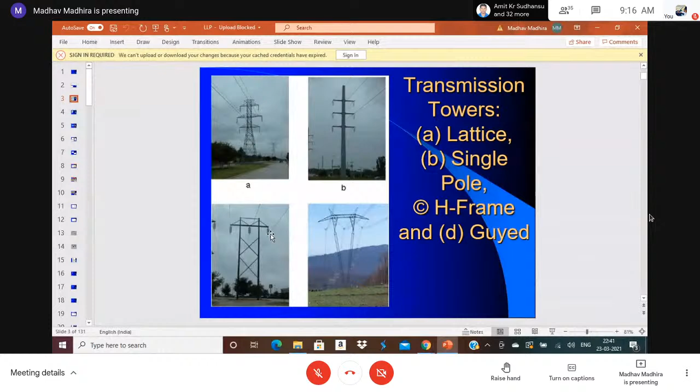Guyed tower is slightly safer because the forces are anchored down below, but other structures will have lateral forces from the cables. When you design, if the cables are all in position, there is not much of a problem. But if there is a cable break, which is what you designed for, then the whole pole or structure will be subjected to large lateral forces and moments. This is a very serious issue in many of these.

The latest, I would say, would be wind turbines, which are coming up all over, and the height and size are becoming very large. You can see recently they have set them up in 20 to 50 meters of water. The height above sea level is about 100 meters, and the wingspan is also about 100 to 120 meters. The wind acts on the blades, so obviously the forces are transmitted to the wind turbine pole and then down into the foundation.

Here we have different types of structures. You have an inverted type of foundation on the ground level, but in the sea you need a large group, you can't have a gravity kind of structure. So we end up getting very large lateral forces and moments. This will be one of the more interesting latest topics that all of us will have to deal and work with.

Another type of wind turbine, you can see the components. One is the horizontal axis about which the blades rotate. The second one would be a vertical axis one, and you see the components here. The scale you can easily see, it's a very high, very tall structure, so the wind forces are very large.

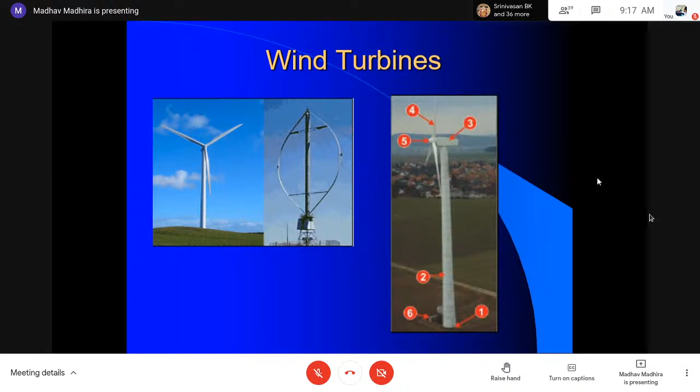This is how wind turbine heights are increasing over a period of time, and now we have gone into even deep sea, where we have to end up having piles to take care of the lateral forces. Once you have these wind turbines in the sea, you also end up getting wave loading, so you get a lot of cyclic loading, which means a large number of cycles, and the soil becomes pseudo-elastic, which you have to take care of too.

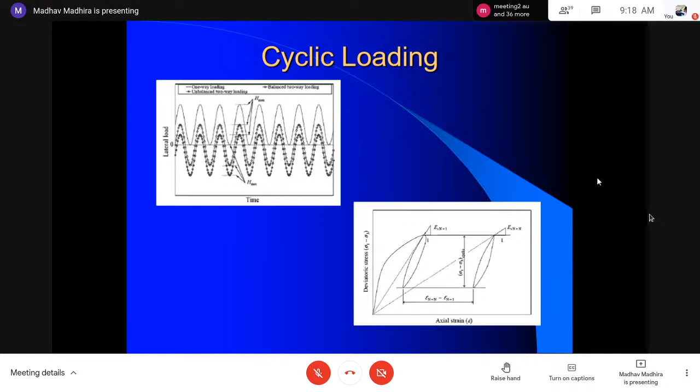Piles are used for a lot of purposes, apart from structural support, excavation support. Recently we had one particular case here in Andhra, where a deep excavation had to be supported by piles. We couldn't provide nailing because it wasn't adequate, as there was an adjacent building and no way we could nail it. So we had to put these touch piles and secant piles, all provided for support. Some of the retaining walls are also supported on that, and you see bridge foundations too.

These are some of the basement walls that you can see. Some of them can be jet grouted or cement mix piles. Particularly for these metro foundations, we are using diaphragm walls too. All of them take care of the lateral forces from the soil, not the structural load.

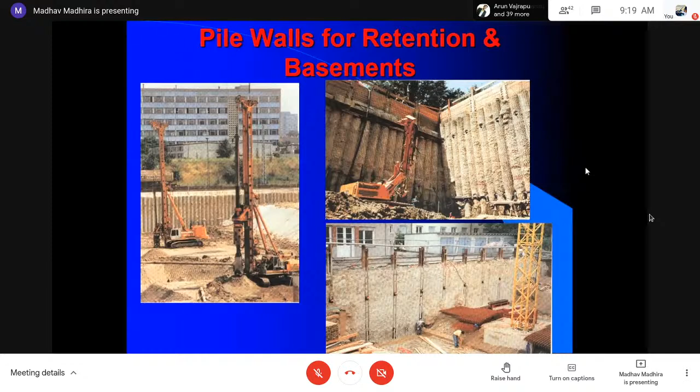These are schematics showing how some of the piles can increase stability. Once you put the piles, obviously you've got to shear them, so the shear resistance of the piles and their moment resistance contribute to stability. This is one case where we applied it in Himachal Pradesh, where the toe of the slope is likely to creep and fail. So we had to provide well foundations here so that the failure surface is intercepted, and the well foundations anchored into rock provide the support.

Of course, bridge abutments are another classic example. You not only have structural load from the bridge, but also lateral earth pressures, because of which you end up getting instability, in which case you have to provide piles both in the embankment and below the footing too. So these are various applications.

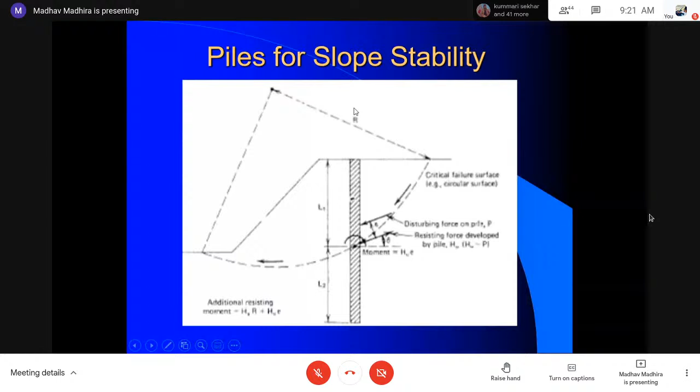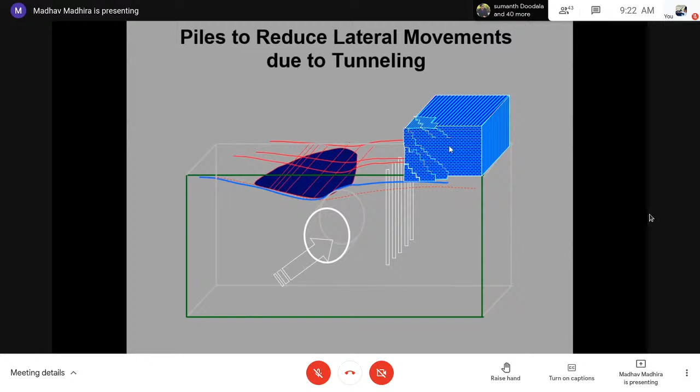Because of earthquakes, we'll have several lateral forces, which we have to design all the buildings and structures for. Of late, we are seeing a lot of activity around Delhi, Haryana. And even if there is a major earthquake in Jammu, Kashmir, Nepal, we find the effect right in this part of the country too.

So when I try to analyze the piles, I want to start with how to classify them, because piles are very long, slender members. So we first look at length as a criterion. You can have a short pile, intermediate length pile, and a long pile.

The idea is that a short pile, with L by D less than maybe 5 to 10, acts like a rigid pile. A very infinitely long pile acts like a cantilever, whereas for an intermediate pile, I need to consider the fixity at the top and bottom.

The second type is the restrained classification. Piles can be restrained at the top as well as at the bottom. We will see how it is being deployed. If I have no pile cap at the top, like a pole, it's a free pile, whereas if I encase the pile in a pile cap, it becomes restrained. At the bottom also, if I leave it in a deformable soil, it can be a free tip. If you just push it into hard rock, then it becomes pinned, allowed to rotate. And if you drive much deeper, it can become fixed too.

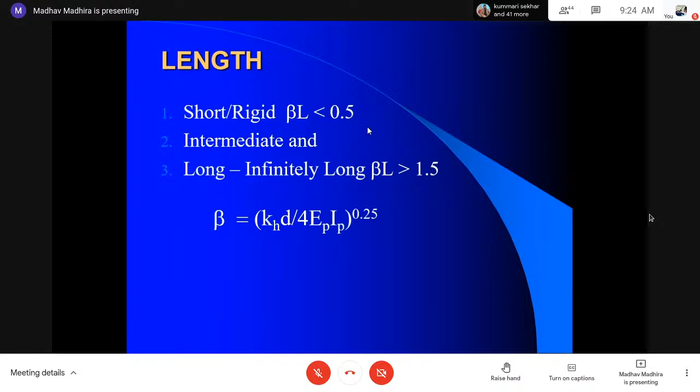If beta L is less than 0.5, you treat this pile as a rigid pile. And if beta L is greater than 1.5, or some people give it as 2.5, then it's an infinitely long pile. Other cases fall in between, and we call them intermediate piles.

As I said, for restrained, free, or fixed head piles: at the top, if it is free to rotate and displace, it's a free pile. If it is free to displace but fixed in terms of rotation, we call it a fixed head pile. The tip can be free, meaning it is free to displace and rotate. Hinged means displacement is zero but it is free to rotate. Fixed means both displacement and rotation are fixed. So these are the kinds of mechanisms.

Based on that, we try to identify what kind of failure is possible. So I want you to look at the possible ones here, and I have a rigid pile here. If you apply load, because it's a short rigid pile, it tries to rotate about a point of rotation, maybe located at some depth h from the top.

I want you to visualize the pile as being treated as a rigid one, which means above the point of rotation, the pile will move to the right because the forcing is towards the right, and below the point of rotation, the pile will move to the left.

So you can see the pressures that are mobilized. Maybe the soil is not strong enough, so you end up getting a smaller stress near the surface, and as you go deeper, this will increase. So we try to determine the reaction from this soil and put the pressure distribution, we linearize it.

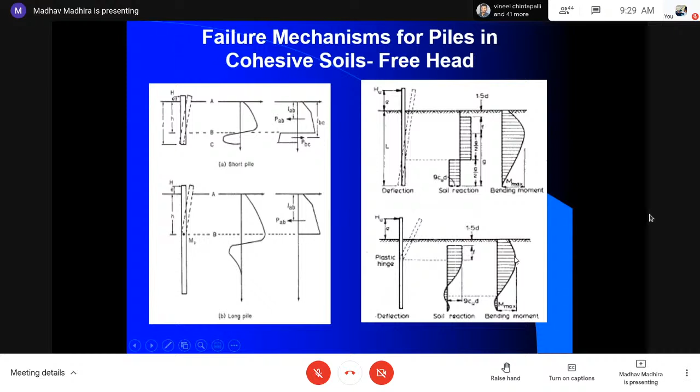If you have the pile embedded in a pile cap, I want you to notice this. Most of the time, this is the most common situation wherein about 300 to 500 mm, the reinforcement from the pile is taken into the pile cap and you cast it. That means the pile is no more free to rotate, but it is allowed to displace.

Lateral displacement is allowed. So if I have a force acting here, it will be a rigid body translation, in which case the full soil resistance of 9 Cu is mobilized, and you calculate the force, and you will find that the bending moment is obviously very high or maximum near the ground surface, and as you go to the tip, it becomes 0.

Then there are other mechanisms where you have a relatively large pile, and if the bending of the pile cap reaches the yield moment, the pile will yield and you have a hinge here, in which case the pile is still rotating as a rigid body, and then you will get the second kind of mechanism. If you have a very long pile, you may end up getting 2 hinges, one at the pile cap, and as you go deeper, the bending moment on the other side.

One is a negative bending moment, as you can see here. The second one is the positive bending moment, and we had to analyze these conditions.

This is what I keep telling, that piles are not very simple. You have to look at the restraint at the top and bottom, and also the length. So this is a very simple way of showing it. I have a short pile encased, so you can see simple translation. Then as the length increases and the bending moment stiffness becomes large, you get the first hinge. Go further, much longer, and you end up getting 2 hinges for the lateral capacity.

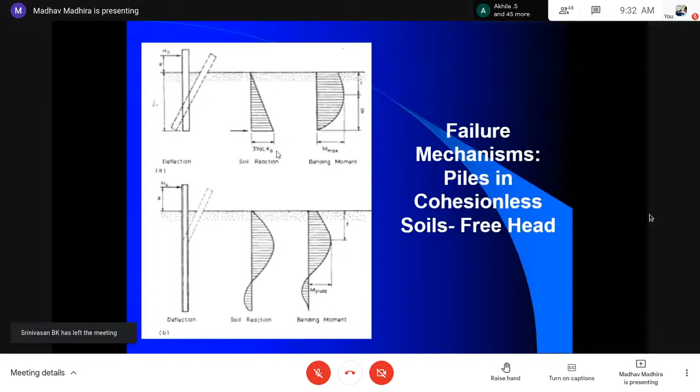If you have a restrained head pile in sands, it's a very similar analysis. You have the pile cap here, the pile is embedded in the cap, and it will be a rigid translation. So H ultimate value is simply equal to the area of this triangle. The bending moment is high at the top because that's encased. Then if this starts yielding, you get the first hinge, and if it yields in between also, you get 2 hinges. So it's a very similar analysis, except we take the passive resistance instead of undrained strength as in the earlier case.

I think Professor Reddy just now talked in terms of socketed pile. Then we had to look at the different medium. Here you can see the pile is socketed, and in this case, because the soil above is not very strong, the point of rotation goes into the socket length. If that is so, I had to consider the reaction from the hard rock here, to the left and right.

Some of the mechanisms they suggest is, instead of that, we introduce an equivalent force to the left and then continue this reaction from the right side, and we try to solve by trial and error to find out how much it is, because finding the exact point of rotation inside a socket length may not be that easy.

So something like a sheet pile analysis, we extend here and try to find out the resistance. The equilibrium equations are very simple: sum of the forces should be equal to 0, and moment or rotation about any point can be 0. So with 2 equations, I can always solve for 2 unknowns and get the values too.

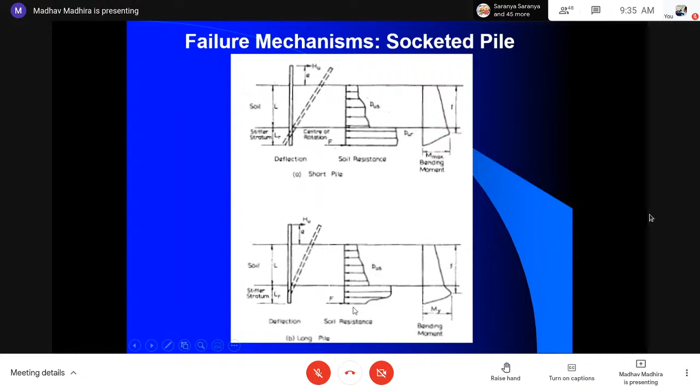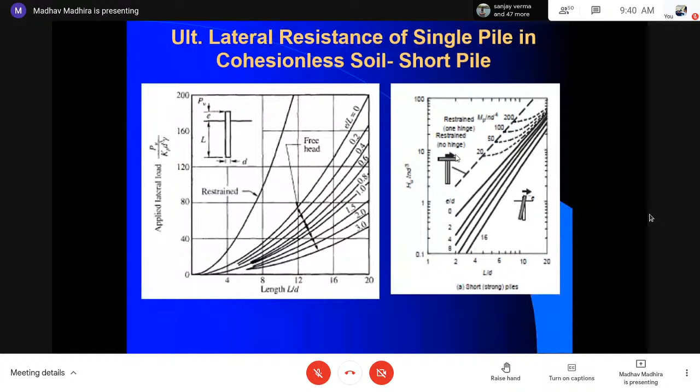In cohesionless soil, we make a slightly different analysis in terms of passive pressure, and we get charts that are very similar, except the magnitudes are very different in this case. Again, I want you to look at this simple case, L by D 8. If I have a free head pile, I get a normalized ultimate load, which is here ultimate load by Kp diameter cube into gamma, against L by D. If I look at 8, I get less than 40, that's maybe around 38 or 35.

If I restrain the pile, I'll get something like 80 to 90, which means even a short pile will have something like 2 to 3 times more capacity, and the longer you go, the gap is much higher. So the most practical situation is you have a restraint at the top, and a free head is very uncommon.

Then you combine the yield moment here and you have a very similar chart as L by D increases. If the yield forms, the yield moment reduces the ultimate capacity, but it is still higher than a free head pile with E equal to 0, no eccentric load.

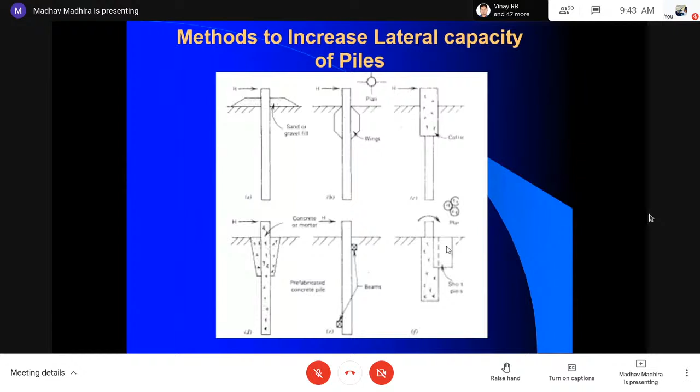I have one pile, and if I know the direction of the lateral force - this is possible in cases where we know the lateral force is acting to the right and the moment is acting there - we could provide short piles to prevent the top of the pile from moving. But in many cases, you cannot fix the direction of lateral force, then you have to do it all over. That is with regard to the ultimate capacity.

We'll now look at the possible variations or how to find the displacements. The most common and simplest analysis treats the soil-pile interaction as a simple Winkler model. I think you all know a Winkler model is nothing but a spring, and the force in the spring is proportional to the displacement.

What we slightly modify is that we provide the Winkler spring with a slider, which means there's a maximum force it can take. After that, it will start moving, which means it is yielding, or the maximum pressure is constant. This is called the modified Winkler model, where the soil reaction is linearly proportional to displacement till it reaches the maximum lateral force or pressure. After that, it will be sliding.

Once you do that, you can easily analyze and get the response displacement at various loads. How do we do that? One alternative is to say the soil resistance is not a straight line anymore, it's a sort of hyperbola, and this is the maximum soil resistance the pile can offer - say 9 Cu, if you want to put it in.

Then you can say as displacement increases, instead of taking the tangent modulus, you take the secant modulus. That way I can take the nonlinearity into account till I reach the ultimate load, but I'm looking only in the working load range. So I estimate displacement with a certain tangent modulus, and once I get the displacement, I go to the curve and get the secant modulus. I put this E value in, and we found that in case of sands, E increases with depth.

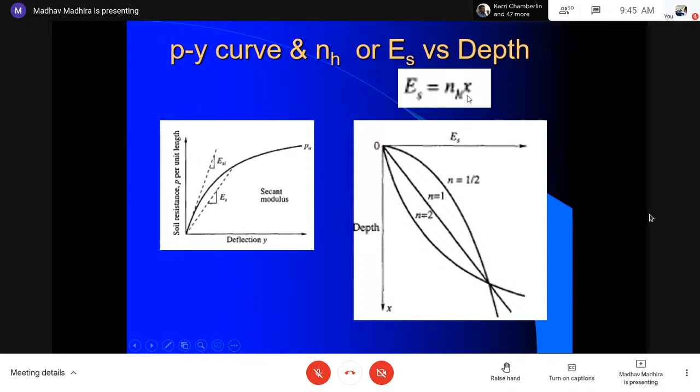The possible variations are a linear one, or it can increase sort of parabolically and reach a very high value, or it can increase with n equal to 2. Most common, I would say, is n equal to 1, where we look at E increasing with the distance or depth from the surface. Once you do that, this is how it looks.

We try to find out KH from plate load test, and convert it from here. If you have this, this is one of the standard ones. If I determine E corresponding to 50% strain, I can calculate KH. If you have undrained strength, C of the soil, another correlation says 80 to 320 times Cu by D gives me the subgrade modulus. So if you want some average value, you take 200, something like this.

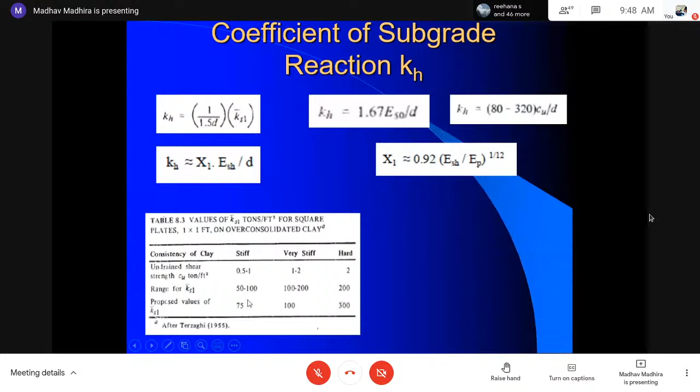Here are the charts that I could get from some of the publications, which Terzaghi gave in 1955. You have undrained shear strength, stiff soil, very stiff soil, hard soil. The range of K is something like 50 to 100, 100 to 200, and more than that. He recommends a proposed value which is about half of these. So you take some of these if you don't design it, but if you can have some reliable charts, you can always go for this one.

So once you have those values, we can predict the displacement. You have found out KH, you know the length of the pile, this H is the lateral load you're going to provide, E is the eccentricity. So I can calculate the displacement here.

Here you can see these values are given in terms of beta L, which is a short rigid pile less than 1.5, and I can get the lateral displacement with a very simple equation. You also get the rotation here. Theta is the rotation of the pile at the top, 6 times H into 1 plus 2 times E eccentricity by L by KH D L square. So you can easily find out these values. Beta, as I said, you calculate as modulus of subgrade reaction into D by 4EI to the power of 1/4.

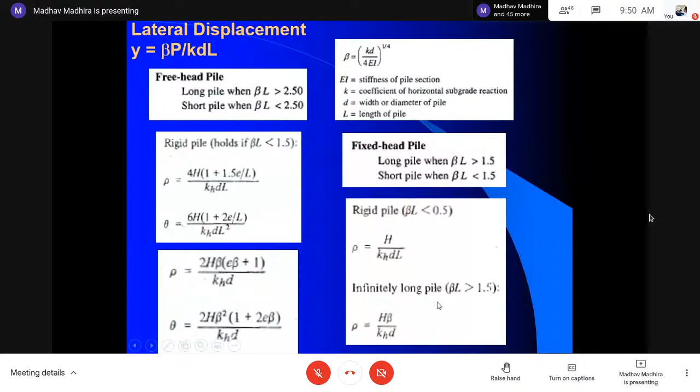So for a rigid pile, a short pile, a long pile, fixed head, you can easily calculate the displacement. These are all available in any book, or for restraint, these kind of things too, charts, books and codes also. If you have a finite length pile, you calculate beta L. As I said, we look at something like 1.5 to 2.5. Otherwise it becomes very large.

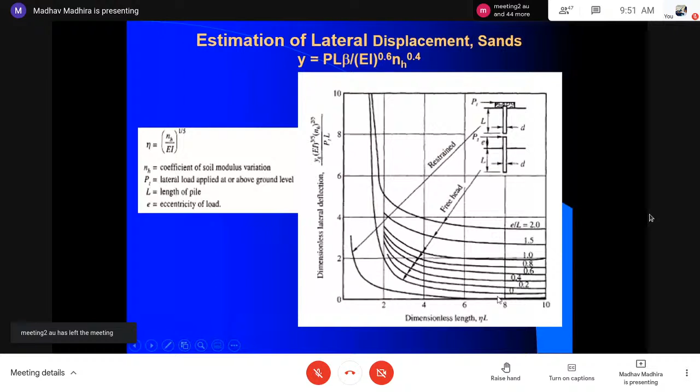So these are some of the more charts given based on analysis, and they find what is called the critical length. Another alternative is to find a critical length, a function very similar to our beta but slightly different, and based on that you can predict the lateral displacement and rotation due to both force and moment.

This is for non-homogeneous soil. Then Poulos at Sydney University came out with a continuum approach. Instead of treating the soil as a Winkler medium, we treat the soil as an elastic continuum with ES as the modulus of deformation, and the coefficient Kr is a relative flexibility parameter. EP IP, the flexural stiffness divided by ES into L4, gives me Kr.

And then he said the displacement is a function of load, H2, rotation due to horizontal, displacement due to horizontal force, and this is due to moment. Similarly, you can get rotation in terms of horizontal force and the moment.

He has given a series of these charts which are available in his book. We can download them from the internet too, as a function of Kr. Kr of 10 to the power -6 is a very flexible pile, and Kr more than 10 to the power -1 becomes a rigid pile, where displacements are almost constant. So as a function of L by D and the relative stiffness factor, I can get displacement.

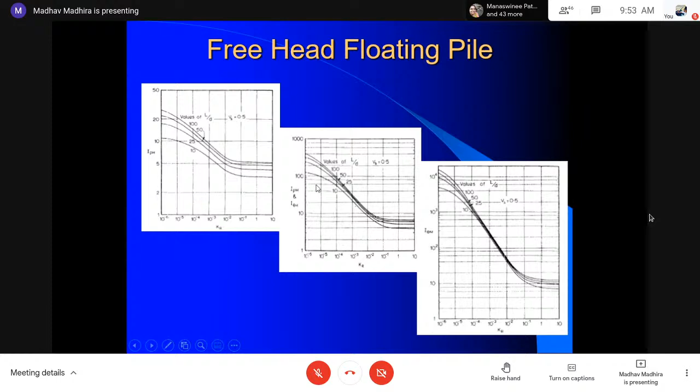Once I have I rho H, I can substitute H by ES into L into I rho H to get displacement due to horizontal force. If I know I rho M, as you can see in one of these charts, here is the relative flexibility parameter Kr and L by D. I can get the I rho M, go back and calculate the displacement due to moment.

So very simple design charts are available in all these cases. Similar to what we have seen earlier, we have a fixed head floating pile, and with the relative flexibility factor Kr and I rho h, you can substitute there and get the displacement. You will find once again the displacement due to fixed head at the top will be much smaller.

This is for sands, where modulus of deformation ES is increasing linearly with depth. In this case, we define the relative flexibility parameter as EPIP into NH. Earlier we had E into L4, but now we get the rate of increase of E with depth, which is NH into L5, and you again get in terms of Kn and the parameter I rho h for sands, or where the soil E increases with depth.

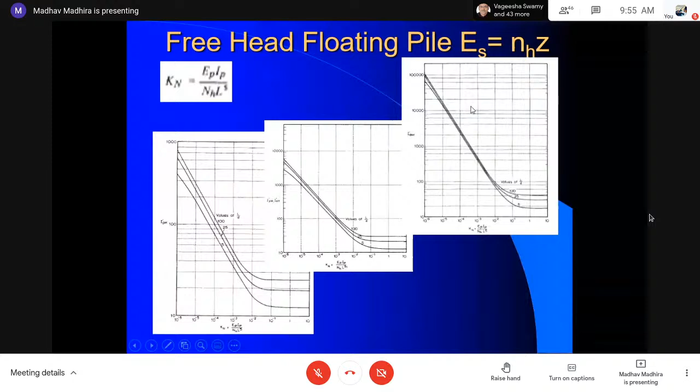This is for I rho h, I rho m, and this is I theta m, the moment rotation due to moment. If you socket it, it makes a big difference. You'll get another set of curves here, and you'll have to take those parameters.

I just wanted to show you what could happen if you have an earthquake. The problem is people think piles are good for seismic resistance, but it's not necessarily true. What could happen is, in this particular case, as you can see, you have an earthquake, you have a building with piles.

Because of the moment, the soil got liquefied and the resistance is gone, they ended up with a crack, or the pile has sheared at the interface between the reclaimed fill and original sand layer, and so the building got damaged completely. So what I want to say here is that piles are not a simple solution for earthquake resistance. You have to look for alternate ways of improving the ground rather than providing piles alone.

These are the different mechanisms we consider with the pile mechanism, with piles for support. This is a typical pile foundation. There could be a shear failure, or you can end up with bending failure here. This is a buckling kind of mechanism, and this is what you call dynamic amplification. As you go from bottom to higher level, the earthquake force gets multiplied.

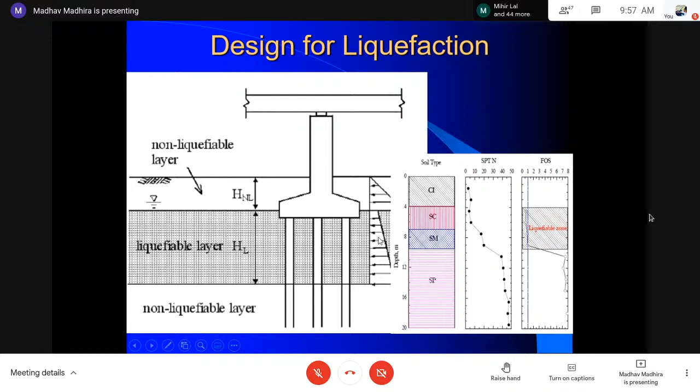So the pile may end up getting a large displacement. It can also, if you restrain at the top, it may kind of hinge at the bottom, and you'll get a large displacement at the center, or you'll end up getting these kind of loadings in these cases. When you have cyclic loading, you have a similar problem, or much more complicated. If the pile can move along with it, fine, but if the pile is restrained, because of the inertial force, you will get a lot of resistance here.

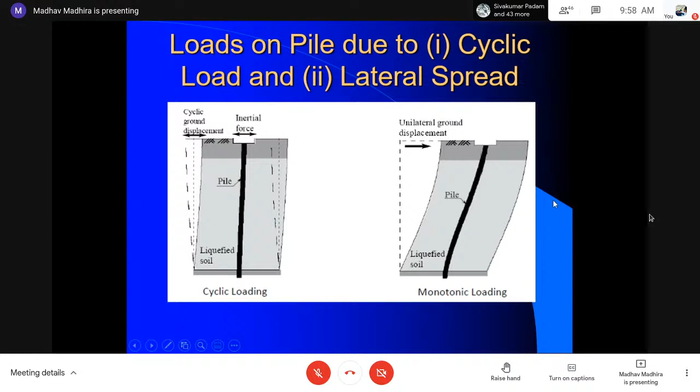So people talk in terms of liquefaction potential index. We had to calculate based on these parameters how the factor of safety against liquefaction varies at different depths. What is the displacement with depth, and you calculate the liquefaction potential index as a function of depth and the factor of safety against liquefaction. Only when you have low values of LPI, otherwise you will end up getting higher liquefaction intensity.

Based on that, if N is equal to less than 8, you can see the chance of liquefaction are very high, and you have to reduce the modulus, whatever is the static value, to less than even 10%, you can see it's hardly 5%, which means there is hardly any resistance. Whereas for higher values, the smaller values of this, you can get much higher one too. These are N equal to 14 to 20. So wherever you end up getting SPT-N less than 8 or 10, be sure it's likely to get liquefied, so piles may not be a good solution.

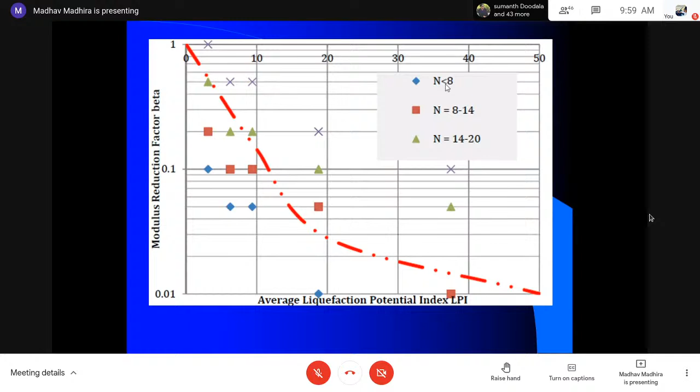I just want to show you one particular design. They were suggesting for earthquake, bored cast-in-situ piles. We were recommending that you try to improve the ground first with stone columns, and we also said that it will be good in terms of carbon footprint.

So we just compared, this is for Delhi Metro, bored cast-in-situ piles. The carbon footprint because of concrete is so much, 667,516 kg. The reason is, when you want to manufacture cement, 1 ton of cement requires 1.5 tons of carbon dioxide releasing. 1 ton of steel probably generates 2 tons of carbon dioxide.

So when I look at the typical project, if I use bored cast-in-situ piles, you're generating about 1,250 tons of carbon dioxide. Whereas if I improve the ground, I only use about 161 tons of carbon dioxide, because when I'm breaking stone, I need a lot of energy and I need to transport it during installation, etc. So we recommend that in case of liquefaction, piles are not the solution, ground improvement is the best one.

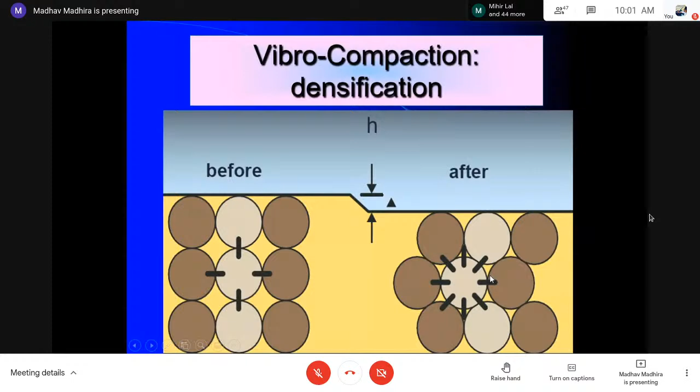And how do we do that? We know the sands are in loose condition, which means one grain is sitting on top of another. That's how you get the loose condition with high void ratio. If you can vibrate it with something, you can rearrange the particles so that they sit in the valleys of the adjacent lower one, and you reduce the void space, you increase the number of contacts, and it becomes very dense.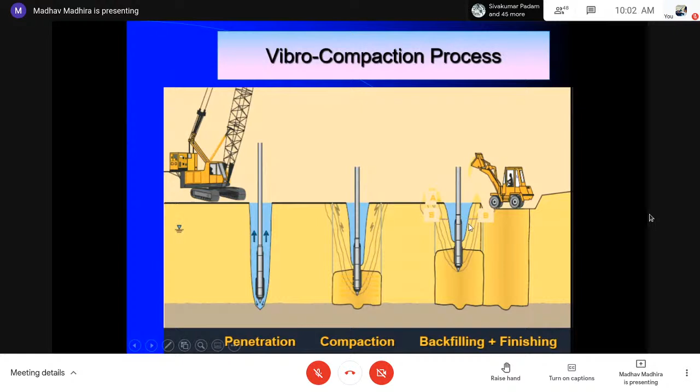You're audible, sir. Okay, so what we do now is that we try to densify the ground by vibrocompaction, and the simple mechanism would be you introduce the vibrofloat, compact it, and add material to finish it to complete this thing. We found out this is a very good alternative.

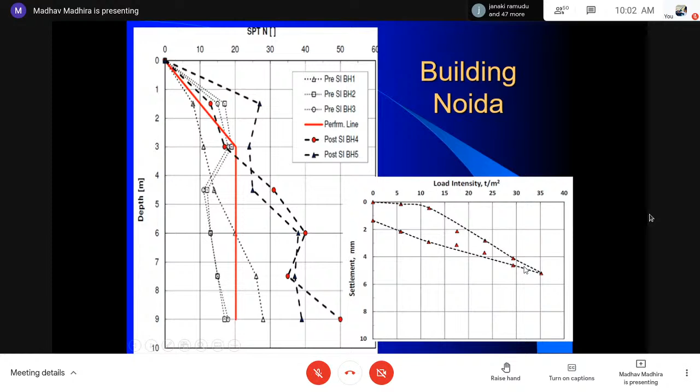Another case is a building in Noida where you had very low N values, and after densification, you have more than 20. Another way they tested was a simple plate load test, and even with something like 30 tons per meter square, the plate gave hardly 4 to 5 millimeter settlement. So the effect of densification you can see here.

then introduce your piles if necessary. The main thing I want to show from here onward is that the capacity of the pile depends on the displacement, or the allowable load that you can put is a function of displacement, and we should not go for those ultimate design values. So one of our colleagues here, Professor Padmavati at JNTU, worked a lot on this.

She was studying the response of a pile due to lateral force and moment using Winkler, except that we were looking at a hyperbolic response, which means the lateral stress increases with displacement, whereas earlier it was linear. The lateral response is subgrade modulus into rho, but instead, you take it as a hyperbolic response wherein the lateral resistance Q equals Ks into rho, the lateral displacement, divided by 1 plus Ks into rho by Q max. So as you increase the displacement, the pressures decrease, and this is how the response looks.

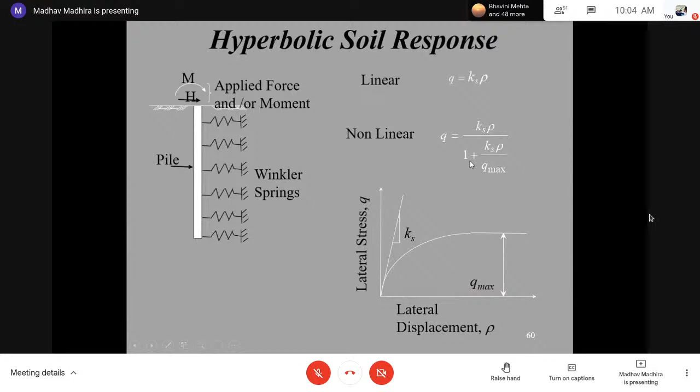So she was trying to analyze this using a simple mechanism, a short rigid pile, where the displacements are maximum here, decrease to zero, and increase on the negative side linearly below. So if I know the displacement profile with a rigid pile, I can substitute here and get the value of Q and integrate it. Very simple mechanism, and we can also find out the point of rotation from the equilibrium equation, and this is what she did.

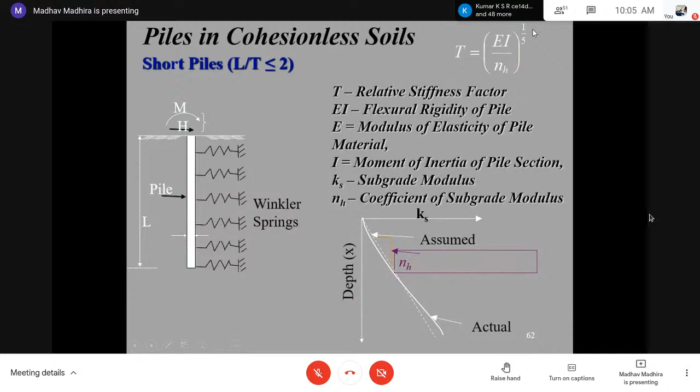So we're trying to look at various alternatives. If you remember, Broms was suggesting an ultimate load, also given by Hansen, Broms, then one of these Polish mechanisms, Meyerhof, then we had Prasad and Chari from Newfoundland, and the resistance variation in different forms were considered, as we were looking at various alternatives in terms of Ks and Q max variation with depth.

Ks is increasing with depth at a rate of alpha K. The ultimate resistance is also increasing at alpha Q. So you can write those equations very simply based on this pressure distribution.

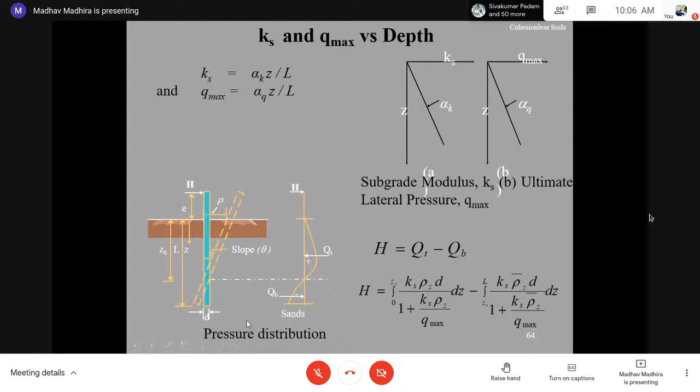So she did a lot of parametric analysis. We looked again at the rate of increase of dry moist sand above the water table versus below the water table. Obviously below the water table this will be much less compared to above. This is taken from Terzaghi.

She worked for different lengths of pile, 3 to 30 meters, pile diameter 0.3 to 6 meters -- of course very high. Angle of shear resistance of the soil is 25 to 50 degrees. Unit weight of the soil varies from 16 to 21.

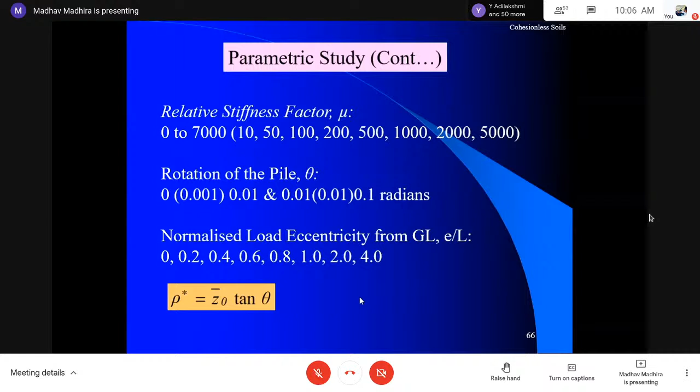So we convert that into relative stiffness factor, pile rotation theta, and normalized eccentricity, and these are the curves. I want you to look at the variation of load with displacement, which means you don't have to go to the ultimate value -- you can work at different levels. Mu is nothing but subgrade modulus into L by Q max.

If Q max is very large, obviously mu will be zero and you will get a linear behavior. But I can calculate, based on the subgrade modulus, the displacement for various loads, or if I know the load, I can get the displacement. So first, we are able to predict the displacement for a given load, or for a given displacement what is the load, using both Ks and Q max. So this actually depends on how the pile is behaving.

And how do I get the ultimate load? When I have pile load tests, I use the Kondner plot, which is hyperbolic. Displacement by H is plotted against displacement, take the slope, and the inverse of the slope gives me the ultimate load.

So I've been able to estimate these and now predict even the point of rotation. As mu increases, the point of rotation goes deep below for different loads too. It is not a constant, it varies with depth.

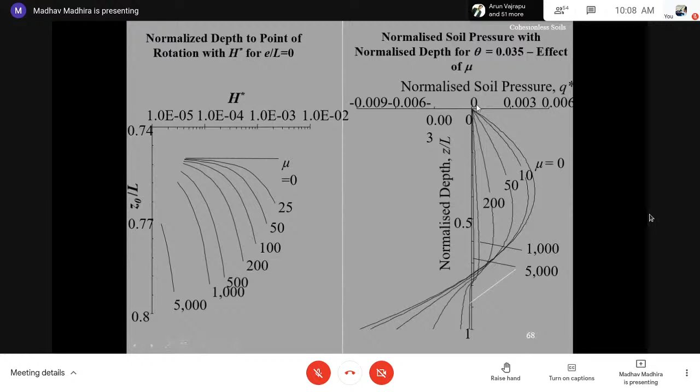This is something I would like you to see, and these are how the pressures are mobilized. I want you to see the difference between these pressures and what Broms assumed, that is for ultimate load. You can see the pressures here could be very small at the top because soil is very weak, and then you get much higher values.

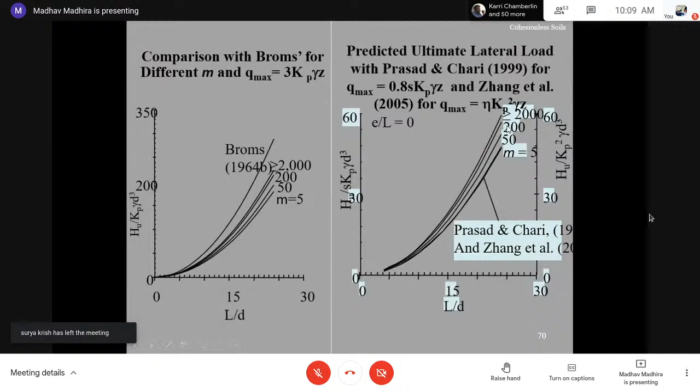So when I look at the kinematics, how the soil-pile soil reaction looks like, here is the design chart for different L by D and different eccentricity. You get the ultimate load, which is a function of both eccentricity and L by D. And then we are also looking at the comparison between predictions and the ultimate values.

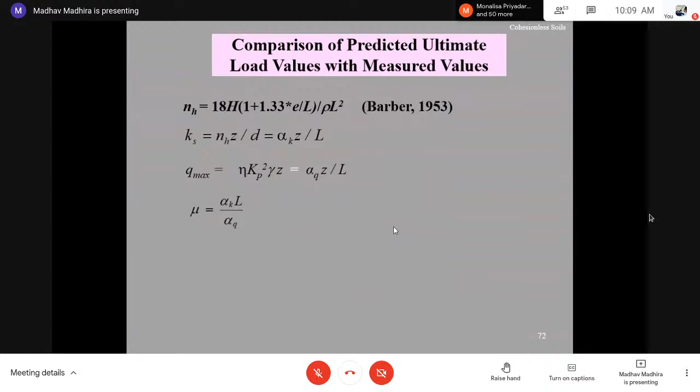This is a very interesting one where we found out different mechanisms and different values of how people are predicting. I would like you to see, compared to the observed and measured values, there's huge, sometimes very significant difference.

And you find that this is measured HU versus, and initially for small values, no problem, but these are all lab experiments, so you can see small load. But once you go higher, you find the values are very high. According to Dr. Padmati's work, you can see her predictions are all falling on the 45-degree line, which means if you look at the kinematics, you can predict better.

We also try to compare in terms of the load displacement relation. You can see here, the actual observed values are the points, and theoretical value is given here, where we didn't know the exact value of resistance, but because these are all very small model scales, we scaled the angle of shearing resistance and we were able to measure better values.

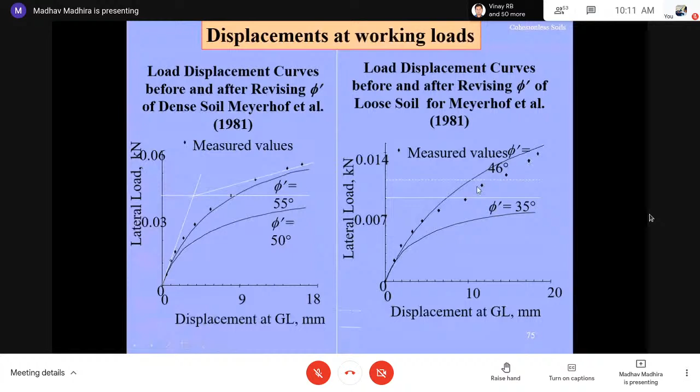Here is another case we got from Meyerhof data, and we find that the fit is much better. So when you look at the lateral load capacity, the kinematics is very important.

Why do we say that? Because you can see under high stress, the Mohr envelope for sands is highly nonlinear, and you should not take a simple linear relation. We find that it can be a curve, and that is why we include that.

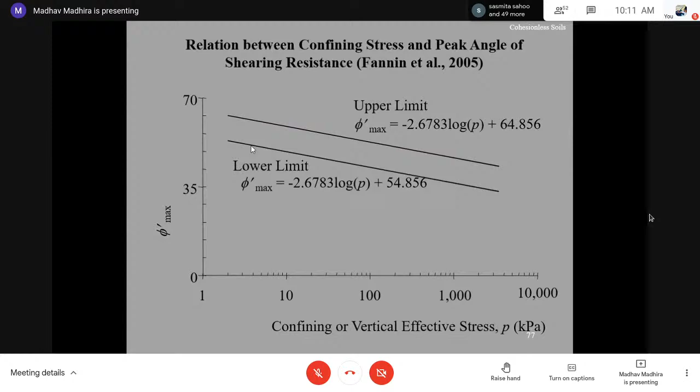This is what we were looking at in terms of as a function of vertical stress. At low vertical stresses, you will have higher shearing resistance, and at larger ones, lower. So when you interpret your lab test, don't go for direct shear test result, go for a low value shear angle of shearing resistance for a low normal stress. This is what was happening.

This is another interesting data we have. This, of course, is load displacement, which is matching. These are other lateral pressures which are measured by Radhakrishna in '73. We had this data, the measured values are the points.

And the ones predicted by Padmati are much better, much closer compared to earlier predictions. Another prediction you can see using Padmati's data is much closer to the measured values.

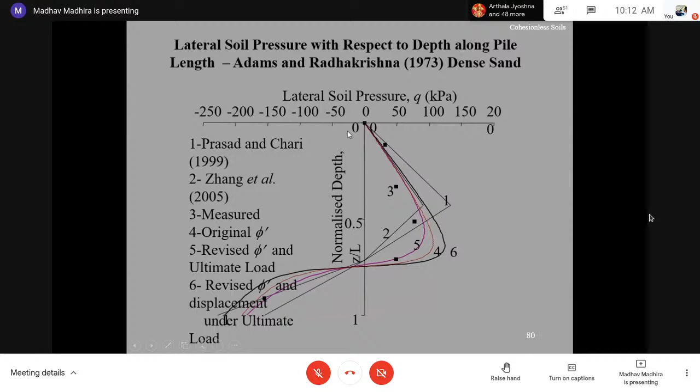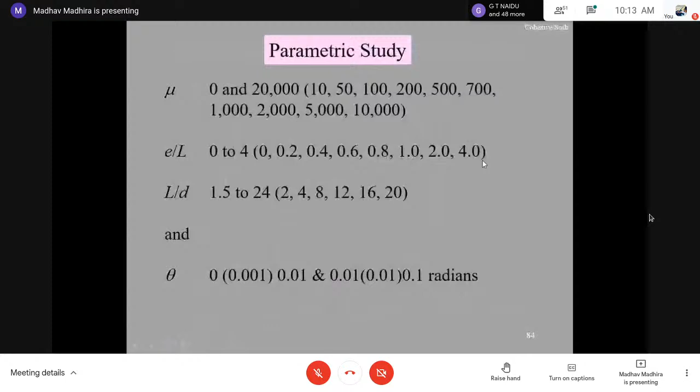And the present approach is where we are assuming a gradual variation rather than a step function. Okay, and this is how we are able to estimate the lateral capacity.

The Broms predictions are here, and the McDonald one, whereas ours are a function of this parameter mu, which is your Ks into L by ultimate resistance. So instead of just looking at only the ultimate resistance, the stiffness also is very important.

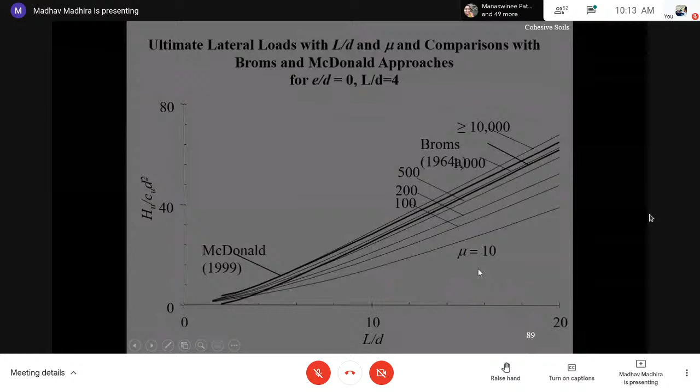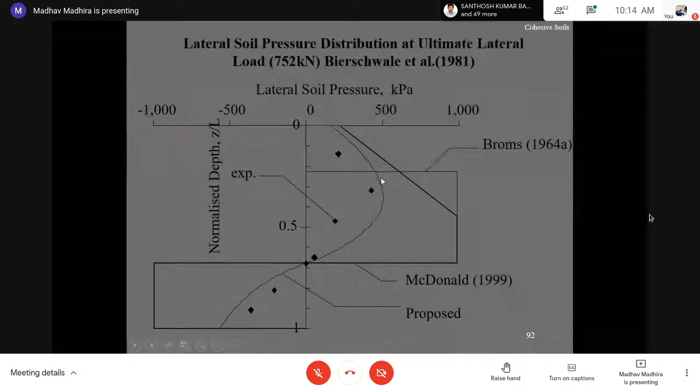So what I would like to finally recommend is this: another good comparison. Broms and McDonald give the step function, whereas if you take the kinematic approach, you're able to predict the variation with depth, and this is how it improves.

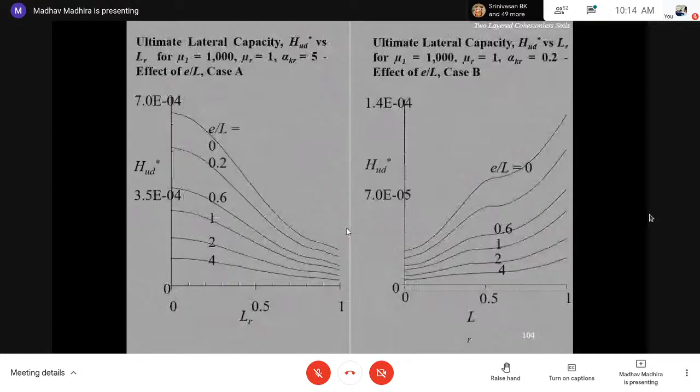Similar to what she did for layered soil too, and we have a lot of data based on that. You can do this for different combinations. This is another good fit we had between experimental and proposed results, and they match.

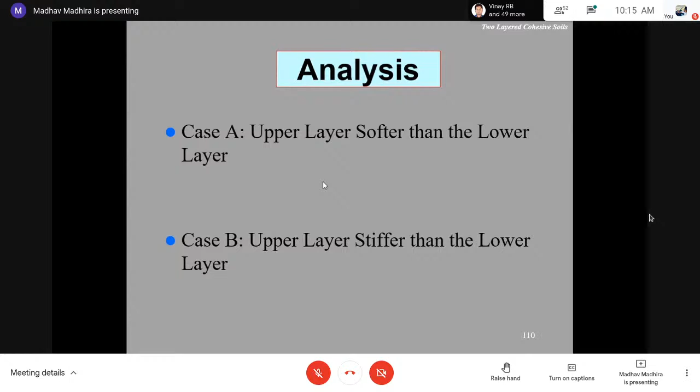Two layered cohesive soil: you have one type of soil above, another type below, and she did a lot of parametric studies. You can have a softer soil overlaying a stiffer one, or a stiffer layer over a soft one too. You are able to generate these parameters and get your variation of lateral pressure with depth.

This gives your load versus displacement for different combinations of layer thicknesses and layer stiffnesses. You get many of these charts, wherein you find the ultimate lateral load as a function of the layered soil configuration.

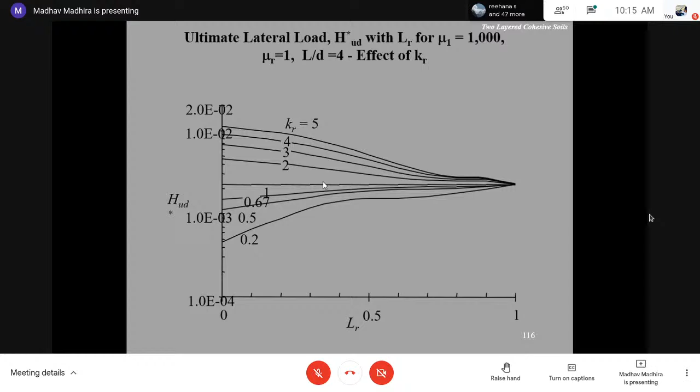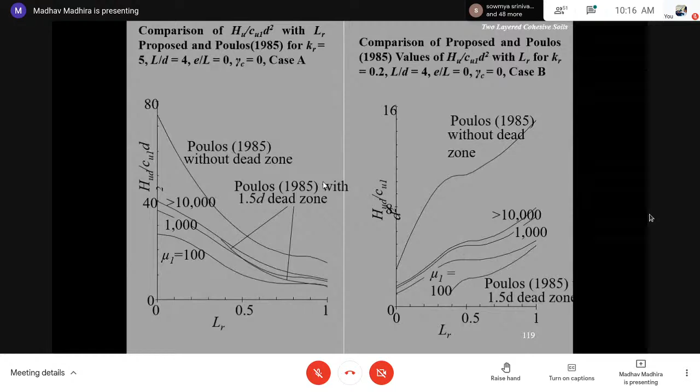We were able to compare with some results available from Poulos. He said there is a dead zone, whereas we have a continuous profile too. The way Poulos looked at it is a step jump, whereas ours would be a gradual variation because of the kinematic approach. So these are some of the comparisons.

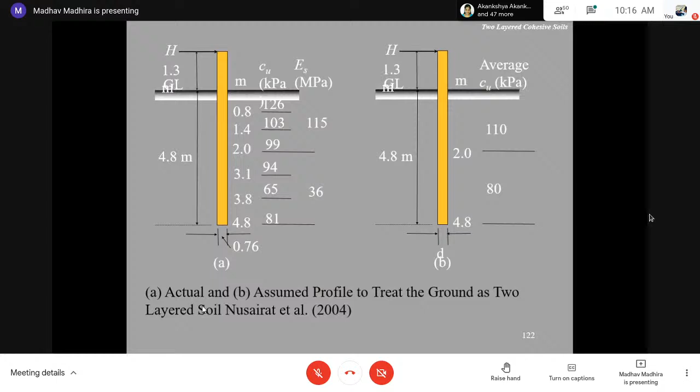One particular example where we had a two-layered soil. Actually, it's a little more complicated, but we converted it to a two-layered soil, and we've been able to predict values that matched closely with measurements using this proposed theory.

When you have a pile group, Poulos again came with a very interesting analysis. If you have a pile here, and another pile adjacent to it, the interaction depends on whether the adjacent pile is in front or away from it.

So I want you to look at this angle theta. If theta is 0, the second pile is in front, and if theta is 90 degrees, the second pile is orthogonal to it. So the influence varies as a function of theta, and you can see that being in front gives you maximum interaction, while orthogonal gives the least.

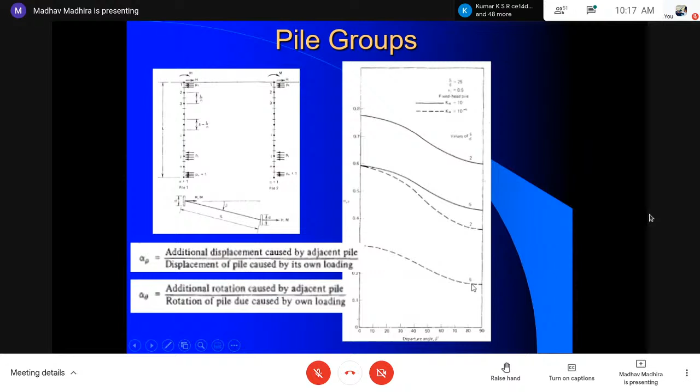He calculated the displacement caused by the adjacent pile due to the load. It increases depending on the spacing, giving different values. If you have a close spacing of 2, you have very high interaction, and if spacing is 5, it's much less. These are the interaction factors for various conditions he has given.

So we can analyze pile groups based on this value. Based on that, he finally came out with the group reduction factor, which tells us what the settlement of the group will be relative to that of a single pile.

Again, you have the fixed head pile and the free head pile, and you can see that it's a function of the pile fixity. The more interesting thing would be how these loads are affected depending on their location.

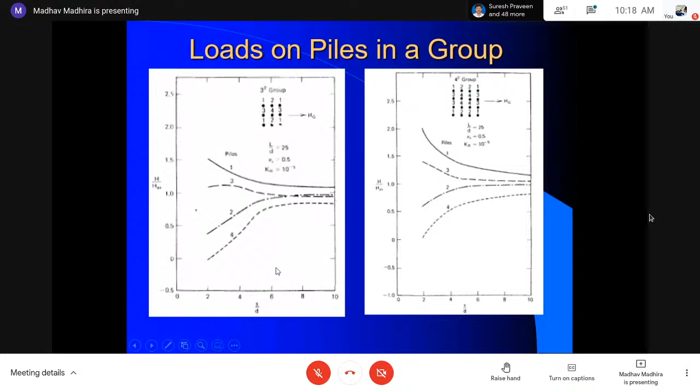I would like to end with showing some nice pictures of a natural forest wherein we don't know why all the trees have taken this shape.

Geotechnical engineering is a science, but its practice is an art. So what we tried to cover today would be how to analyze piles subjected to lateral forces and moments. In a nutshell, you have to consider 3 to 4 parameters. One is L by D, which will tell you whether it's a short pile, intermediate pile, or a long pile. Second would be the pile fixity at the top and at the bottom. At the top, it can be free or fixed inside a pile cap. At the bottom, it can be free in case of a floating pile. It can be hinged if you drive it into hard rock, but not much - lateral displacement is restrained, but more rotation is allowed. If you socket it into hard rock, it becomes a fixed pile. The analysis are either based on ultimate capacity, or if using Winkler, you are using only subgrade modulus.

What we now covered would be kinematics, in which case we also look at both the ultimate lateral resistance of the pile and the modulus of subgrade reaction, but look at it as a hyperbolic response and try to find out what will be the ultimate capacities and what will be the design displacement. We can also look at the layering effect - if I have a soft layer on top compared to a stiff layer, or if you have a stiff layer on top and a soft layer below, you can find it out.

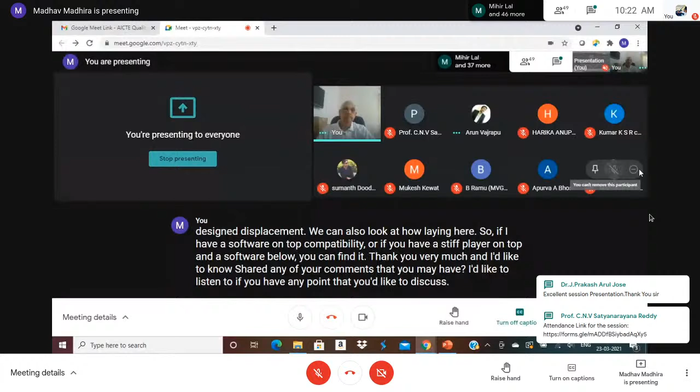It's a very interesting field, but you need a lot more data to predict the behavior. And my recommendation is don't treat the pile as free head - always look at a fixed head pile and see what kind of restraint it will give you in terms of performance.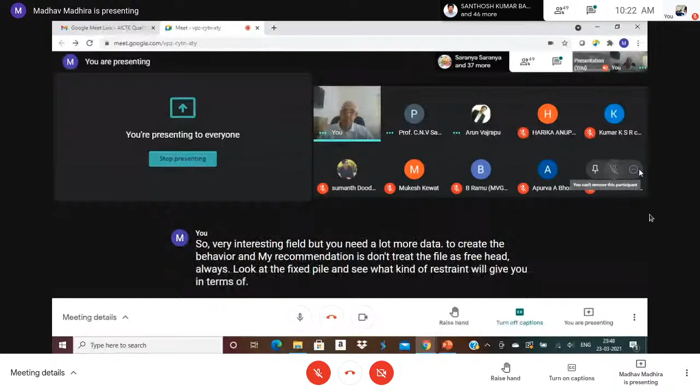Hello, sir. Yes? Hello? Yeah. Can you wait a minute? Yeah, can you? Yes, sir.

Suppose if the contractor or client has given the lateral load capacity by conducting the free head test, and if they are going to do pile capping and all, in such cases, can we increase the capacity by 30 to 40% and recommend it, or what should we do?

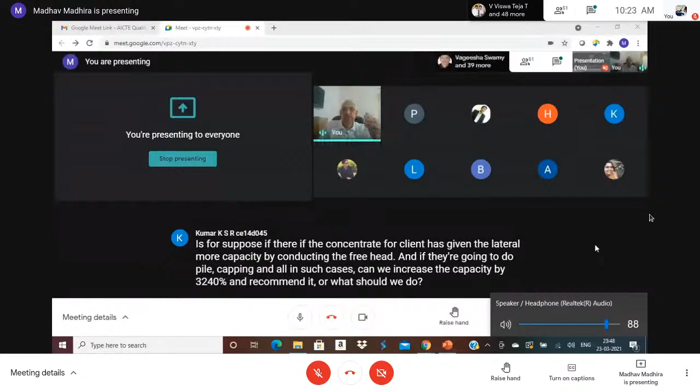That 30 to 40 is something which I will not be able to precisely tell, but I'll go back to my analysis, and if for a given L by D and for whatever condition I get a capacity, I look at the chart - I've given you some of the charts. Use the chart, it can be even more than 50 to 100%. My point is 30 to 40% is very safe, but actually it could be even much more depending on the geometry of the pile and the ground conditions.

One of these charts, you have L by D, you know, free head pile, and you also have fixed head pile. Use that chart and say I can increase it in terms of ultimate capacity.

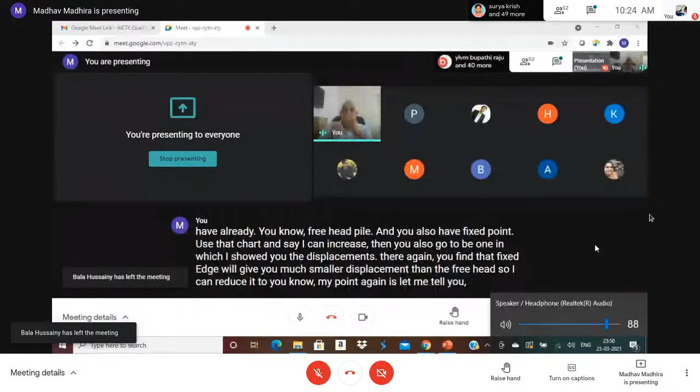Then you also go to the one in which I showed you the displacements. There again, you will find that fixed head will give you much smaller displacement than the free head, so I can reduce it too. My point again is, let me tell you, ultimate capacity is one extreme case. Most of the time, we are interested in the serviceability limit condition, how much displacement can I allow. When you do the code, they say 5 mm is the lateral displacement - at 5 mm, what is the load? That is considered as the ultimate load for free head pile. But for a fixed head pile, if I look at displacement, as you said, it can be more than 30 to 40% or even 100%.

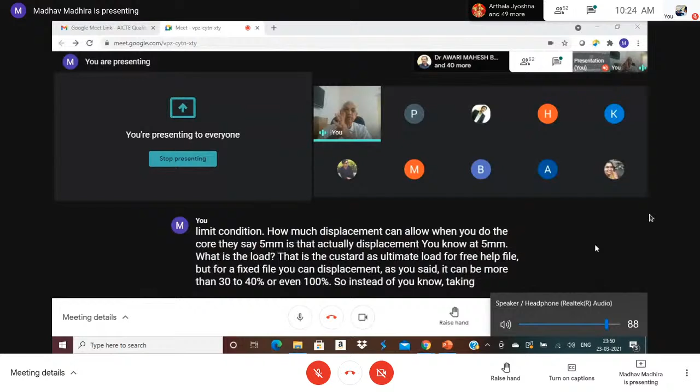So instead of taking a vague value of 30 to 40, I suggest you go for one of the design charts, use that to increase the lateral capacity for design. Okay. And in that clay soil, sir, initially you mentioned 9 times Cu, the undrained shear strength.

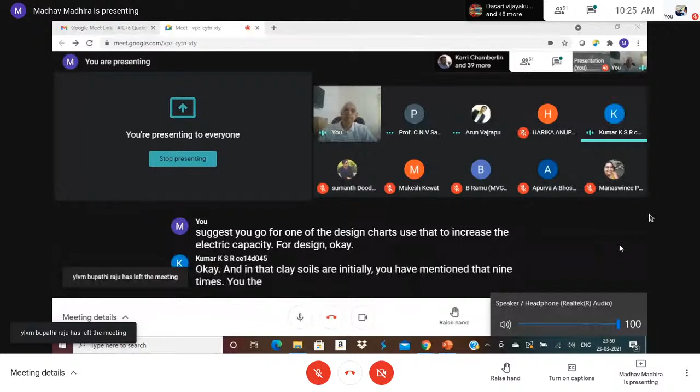Is it an empirical value, or is there any background for that? There's no background. Broms has just given that it can vary anywhere from 9 to 12, or even 16. But that is some arbitrary value.

And regarding the alternative you suggested that was shown, what do you mean by these wings which were provided at the top? It means you provide a blade kind of thing.

But what I would recommend is that you take the lateral capacity of the pile cap. In one of the projects I had, the pile cap was around 3 meters below ground level, and the pile cap thickness was around 2.5 to 3 meters.

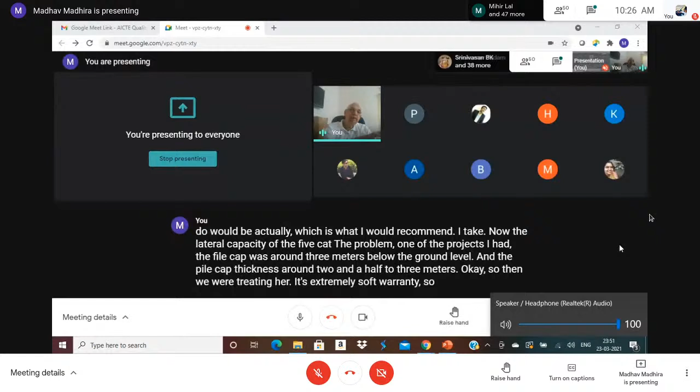We were dealing with extremely soft varved clay, so we replaced some of the top layer with good granular material. I had a pile cap with piles. The piles were giving me hardly 2 to 3 tons per pile, whereas the lateral forces required for this power plant were much higher.

So what we said was, the pile cap is very large, let's say something like 8 meters by 8 meters, with a thickness of 2 meters at a depth of 3 meters from ground level.

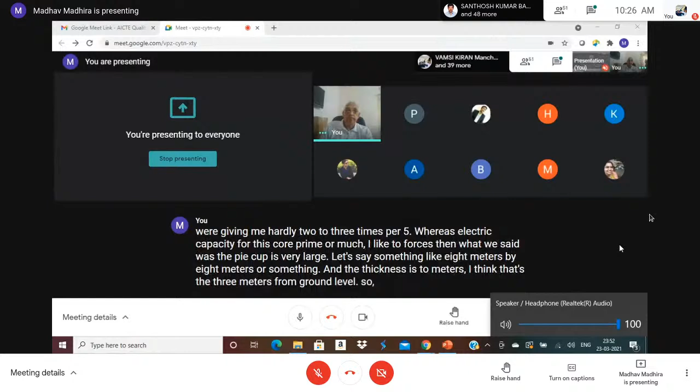So when I look at the passive resistance, the pile cap will move along with the piles, right? Yes, sir. Why should I only take the pile capacity alone? I can take the capacity of the pile along with that of the pile cap, and then I could increase the capacity and get better values.

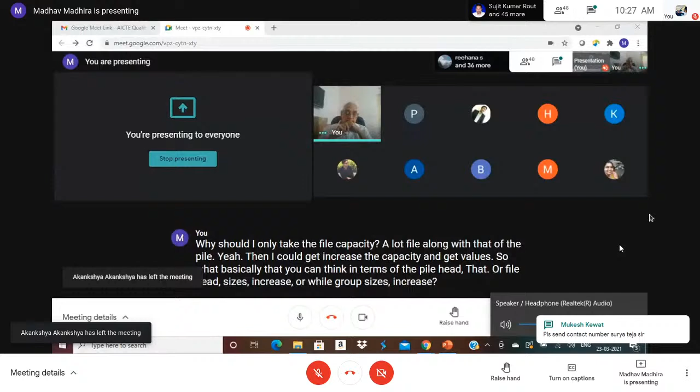Sir, can you suggest any textbooks for understanding this lateral load capacity? The two very good books are Poulos and Davis, Pile Foundation Analysis and Design, which is available if you go to the International Society website.

There are actually three books. Tomlinson is good for Deep Foundation and Shallow Foundation. The third one is by Fleming, and another author is Randolph, called Piling Engineering. Thank you. You're welcome.

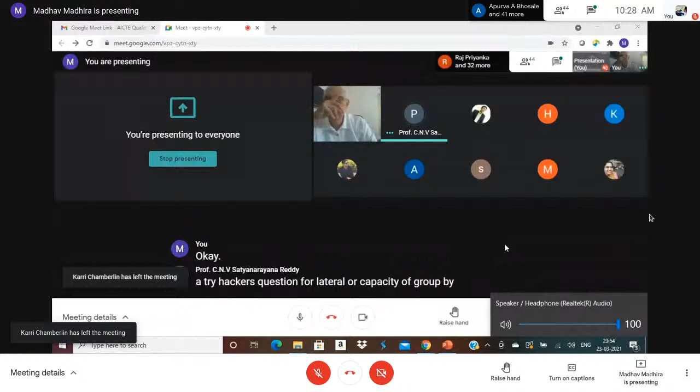But only thing is, be careful. IS code is very, very misleading. I've been trying to change it to look into the fixed-head conditions. And don't use your data from free-head pile at all, unless you modify it.